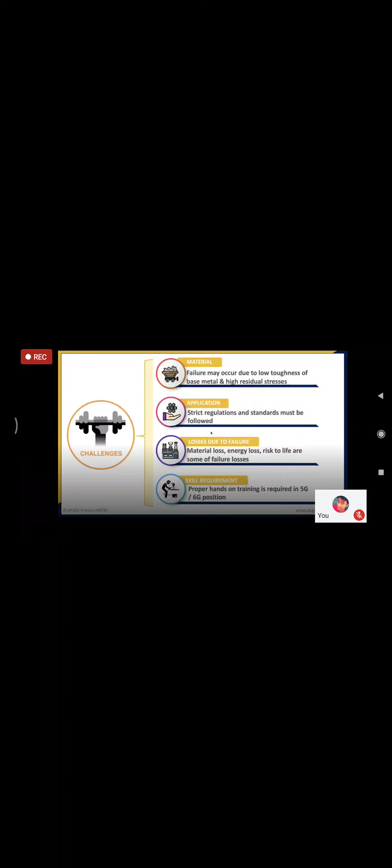Talking about the material, as we move on, new sorts of applications are coming on, and in order to meet those challenging engineering applications and needs, there are new materials which the metallurgists are developing day by day. And in order to fabricate those new age materials, the welding industry has to struggle a lot, because unless we can weld that material, it cannot be used for any engineering purpose.

A good example of that will be our thermal power plants. Very critical application. There is a huge demand of power, which has led to the evolving of new types of material, which have higher creep strength and better life, so that they can carry the fluids, maybe the steam or the gases, at higher temperatures from one place to another inside a thermal power plant.

And that has led to the evolution of very different types of materials with a lot of alloying elements such as chrome and molybdenum. And certainly the materials have been developed, but then to fabricate them, to weld them, is a real challenge, a real nightmare. And a lot of attention has to be paid in order to weld those sort of materials.

Then apart from that, the sort of application I was talking about, there are certain applications which are very strictly governed by regulations and standards, such as the nuclear application. I showed you a nuclear vessel being fabricated and being commissioned. And in order to fabricate that vessel, there's a huge amount of standards one needs to follow, not only national but international standards. Because if those are not met, you cannot commission that unit. So application again throws very grave challenges.

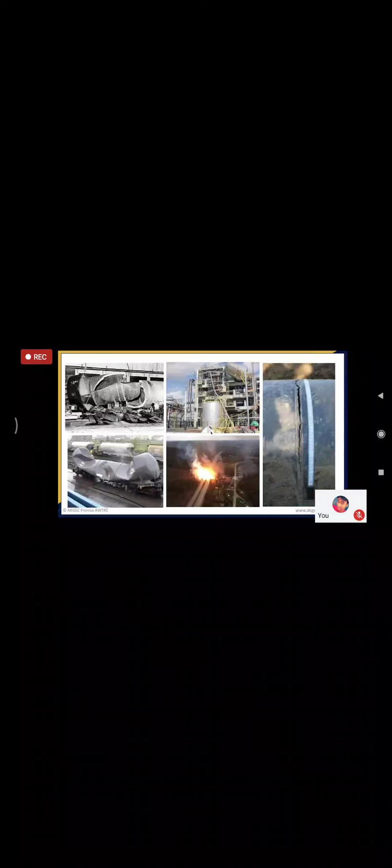Now I'm sure this figure might surprise you, but believe me, I have not put this picture to frighten you, but just to make you aware of what happens if we are not able to follow those guidelines, if we are not able to do the job correctly. This is what can happen. You can see, I don't need to elaborate it. So it can fail, and failing means anything can happen, big accidents, small accidents will happen.

But then yes friends, there is nothing to worry about with this. We have to be cautious enough to do it in the right way. There are processes and procedures available with us to do it correctly, so that we can avoid these failures, and we can do it in the right intended way, so that these vessels and pipelines can serve the purpose which they are intended to serve.

So from here on friends, may I now invite my colleague Mr. Vivek to take on from here, and he will be basically getting into how this is done, how those challenges are faced, how those challenges are met, and he will be able to tell you what are the precautions which we should take in order to avoid those sort of failures. So with this, may I request Vivek to take over. Vivek, please.

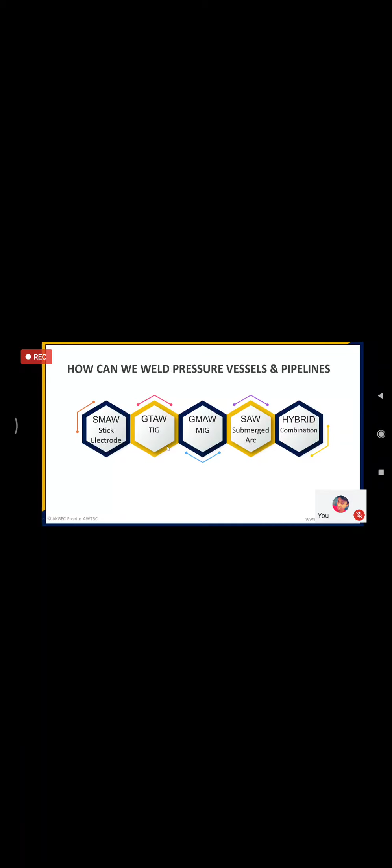So, we commonly know some of the welding processes used for welding in pressure vessels and pipelines. The traditional processes which are majorly used are SMAW, that is shielded metal arc welding, GTAW, gas tungsten arc welding, also known as TIG, then GMAW, that is gas metal arc welding, and SAW, which is submerged arc welding, and we are also using combinations of some hybrid processes. So these are some basic classifications of welding, and the main criteria is how to select welding processes for pressure vessels and pipelines.

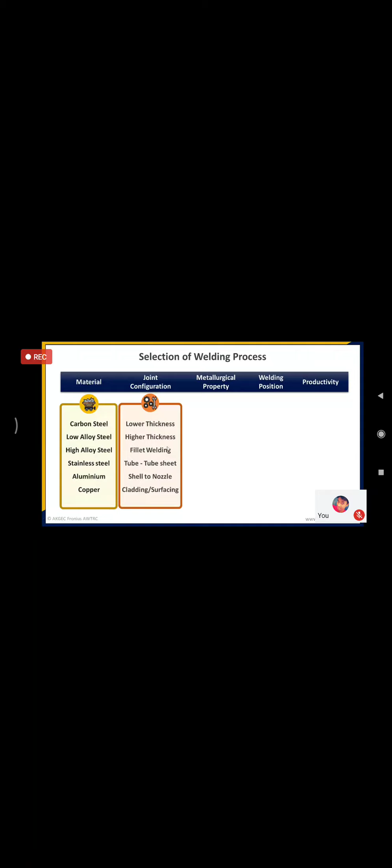Coming to joint configuration, this is also a major challenging part, because in vessels and pipelines we are dealing with very low thickness and higher thickness also. So accordingly, we have to select welding processes so that we can overcome welding defects such as distortion. Talking about some critical welding, in pressure vessels tube to tube sheet welding is very critical, because the tube is about 1 mm to 2 mm thickness, and the tube sheet is around 100 to 150 mm thickness. So it is a challenging task to weld low thickness with high thickness. And after that, shell to nozzle welding and cladding. So accordingly, different welding processes are used for these joint configurations.

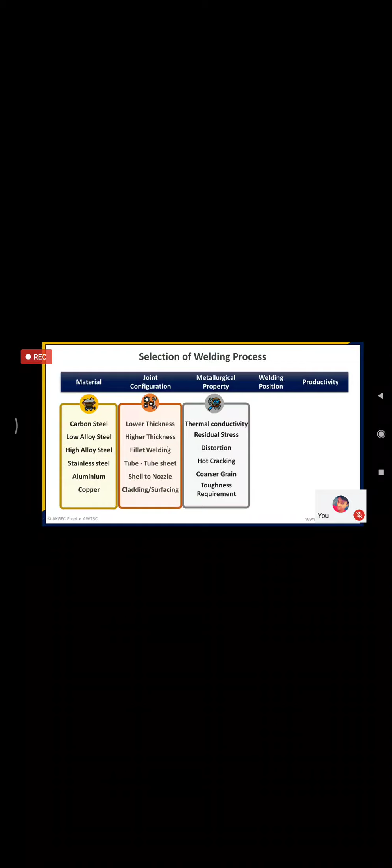Talking about metallurgical considerations in welding, we are talking about thermal conductivity, distortion, hot cracking problems, and toughness requirements as per code and client requirement. So keeping the above in mind, we have to select welding processes.

After that, we are talking about welding positions. Pressure vessels are large, and it is not always possible to weld in flat position. So a number of welding positions come during welding, like horizontal 2G, vertical 3G, overhead 4G, 5G and 6G. So according to positions, we have to select welding processes. And after that, we consider productivity also, because three major passes are considered to weld any vessel and pipelines.

So first one is root pass. So for root pass welding, we have to select some manual process or automatic process. And after that, fill up and capping passes and final run. So to complete all these passes, we have to select single welding processes or multiple welding processes depending upon thickness and requirement of welding.

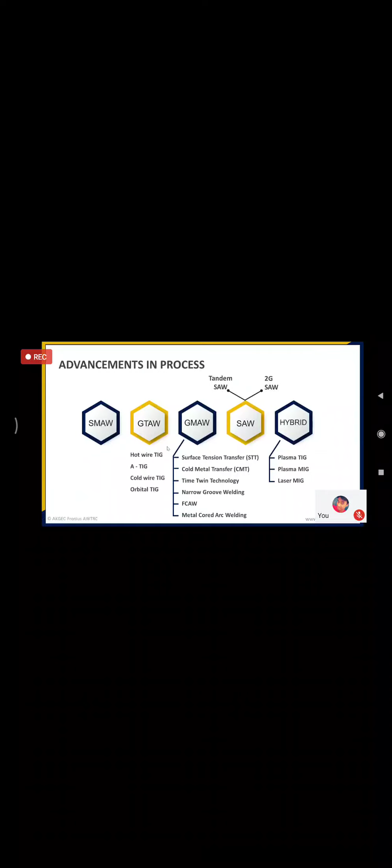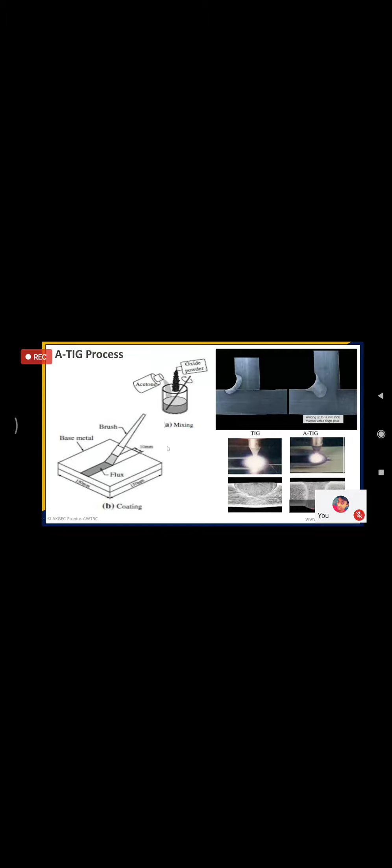Here in figure we are seeing that complete root penetration is coming with activated TIG, but with TIG welding there is lack of fusion. So by using activated TIG process, one can weld up to 12 mm thickness in stainless steel in single pass weld. So this is a very great achievement of TIG processes, and this can be used in varieties of materials like stainless steel, carbon steel, and alloy steel.

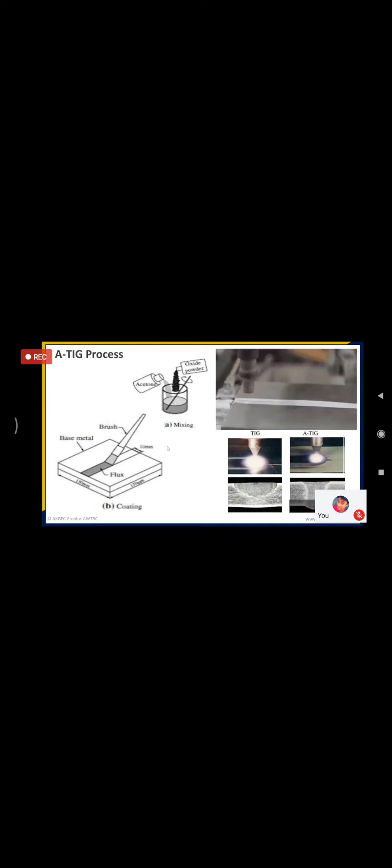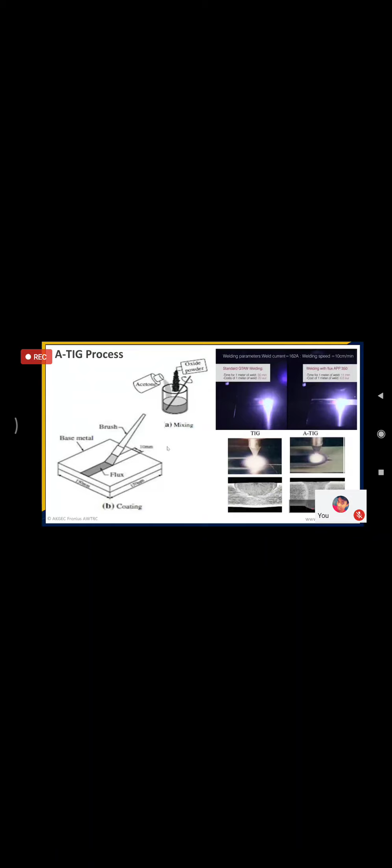Some of the advantages are that we do not need to prepare any groove for this, so it can be welded on square butt joint without any preparation, and also overall reduced distortion than multi-pass GTAW welded joint by using this activated TIG. So here we have to only make a thin coating of activated flux material over the workpiece before welding.

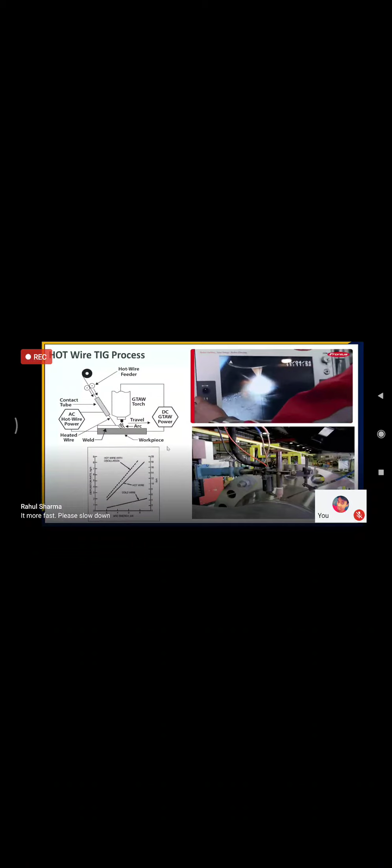So going to next welding processes, this is hot wire TIG process. So hot wire TIG process is a further development of GTAW process. So here in figure, we are seeing that an additional filler wire is provided, which is resistance heated and added to the weld puddle behind the tungsten. So it can be mechanized and automated for welding and cladding application.

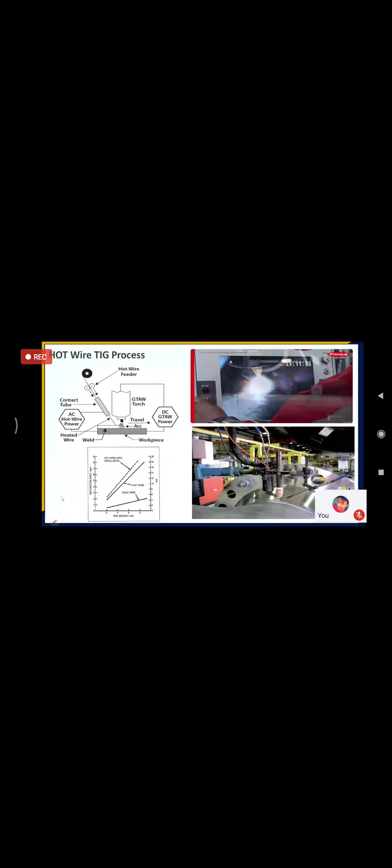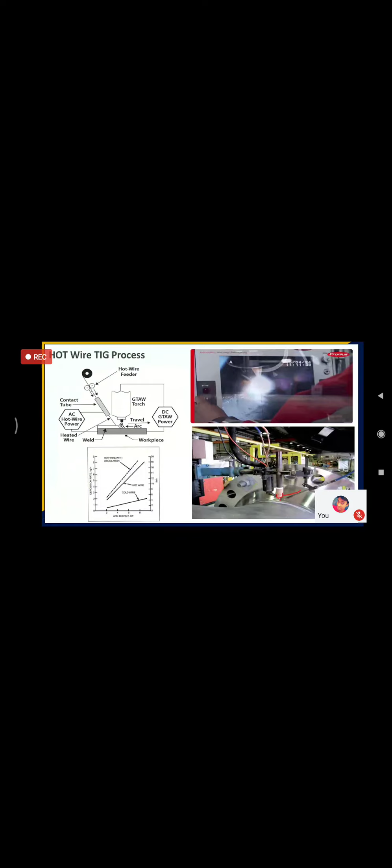So in figure we are seeing that wire is coming from wire spool, and GTAW torch is used for making arcs. So it completes the welding by using mechanization, and this process has higher deposition rate. When we are comparing simple cold wire TIG and hot wire TIG, here we are seeing that hot wire TIG is associated with higher deposition rate.

So this is generally used for welding of stainless steel grades, duplex steel, high nickel alloy steels. Well, this process is not suited for out of position welding, so it is generally welded in 1G position.

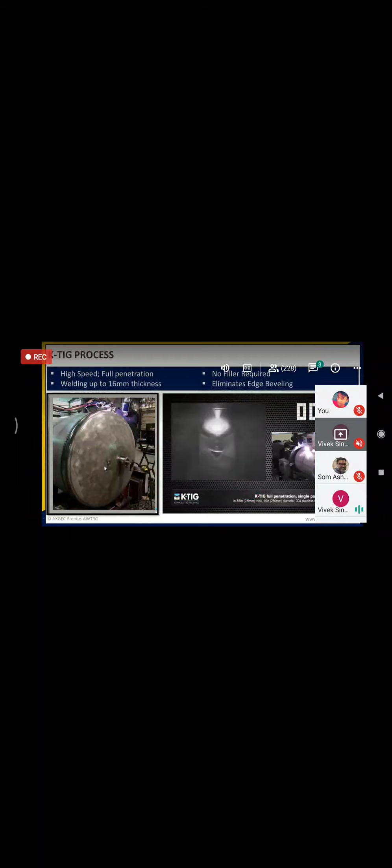After that, coming to next welding processes, this is keyhole TIG. So keyhole TIG provides us single pass keyhole welding in a material. So by using this K-TIG process, one can weld up to 16 mm thickness at higher welding speed. So we can attain higher welding speed up to 1000 mm per minute. And also here we are seeing that this process does not require any butt joint preparation. So it can weld in square butt preparation and also reduce overall welding cost.

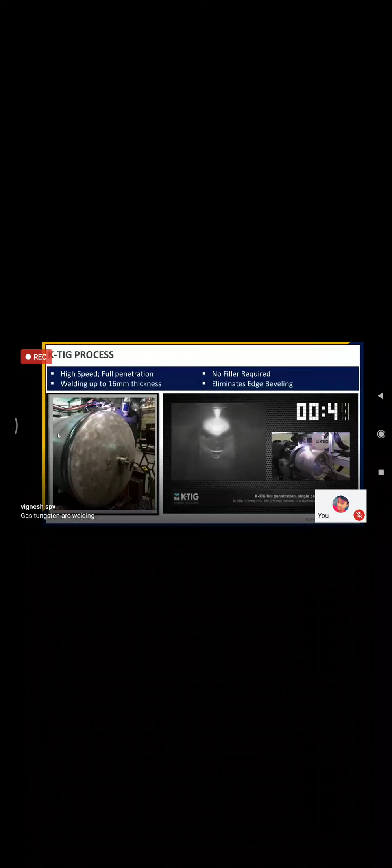So by using K-TIG, we can weld longitudinal seams and circumferential joints over stainless steel vessels, duplex stainless steel, titanium steels, etc.

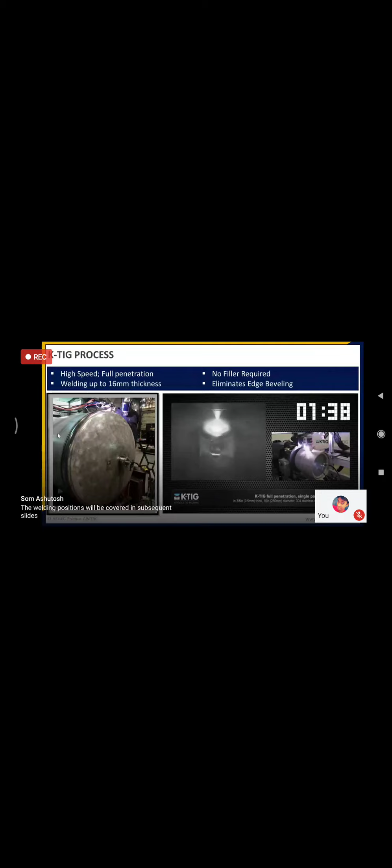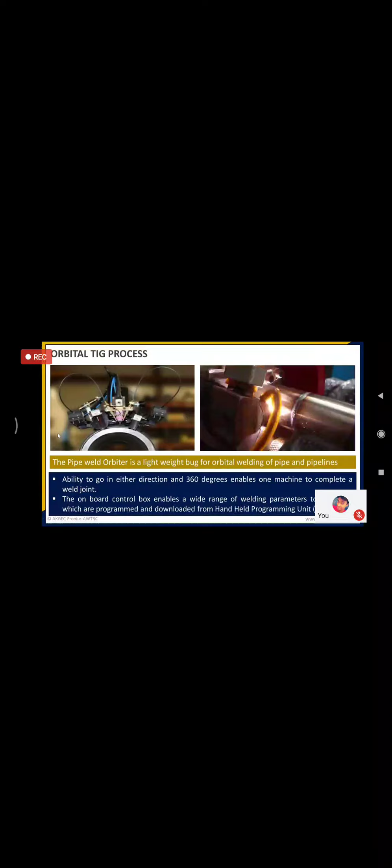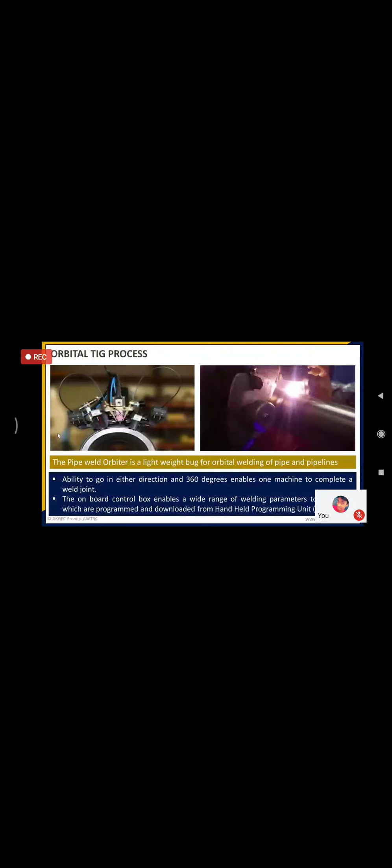After that, moving to next, we are seeing orbital TIG process. So this orbital TIG process is majorly used on pipe to pipe welding and tube to tube sheet welding in pressure vessel. So here we are seeing the welding where the arc is rotated mechanically through 360 degrees around the static workpiece. So the workpiece is stationary and the arc is rotating around 360 degrees with the help of welding heads.

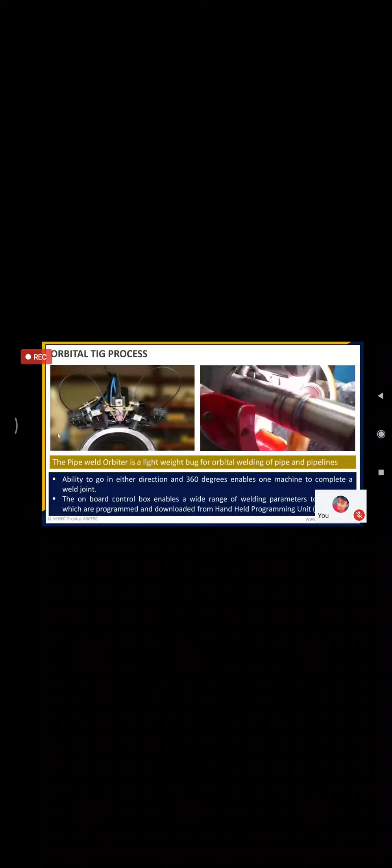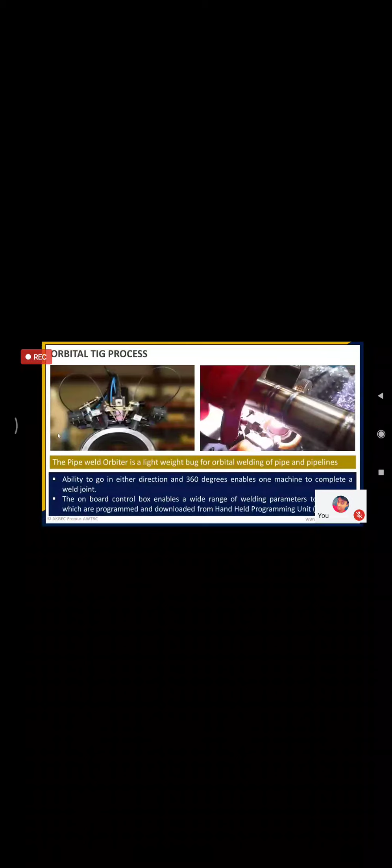So here welding around the pipe resolves the skill associated with it, as highly skilled welders are needed in the manual TIG welding process. So by using orbital TIG, we can easily weld at higher speed. So here uniform welding around the pipe can weld up to 162 mm dia and thickness of 3.5 mm. Large dia can also be welded by accommodating an open style welding head.

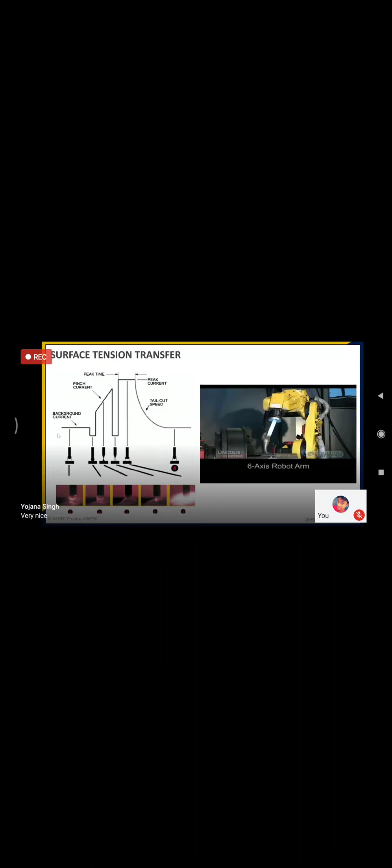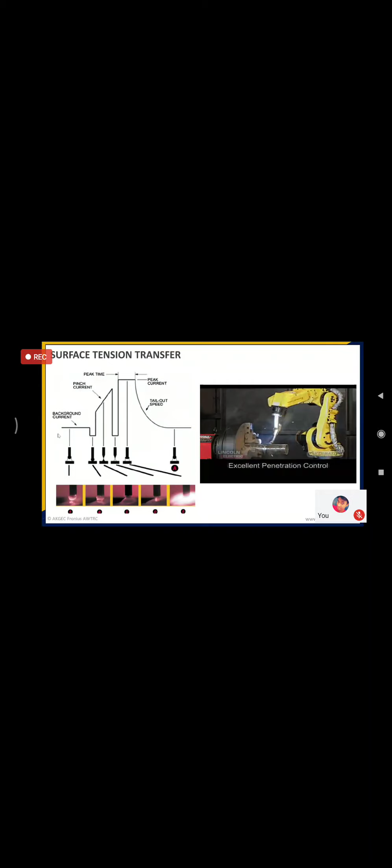After that, coming to the variants of GMAW. So first one is STT, surface tension transfer. In surface tension transfer, this welding process is used to weld the root run in pipe welding. Generally, root run welding takes a lot of time because the welder needs skill to fill the root run. So by using surface tension transfer, one can increase the productivity 4 times faster than the GTAW process with low heat input and no lack of fusion.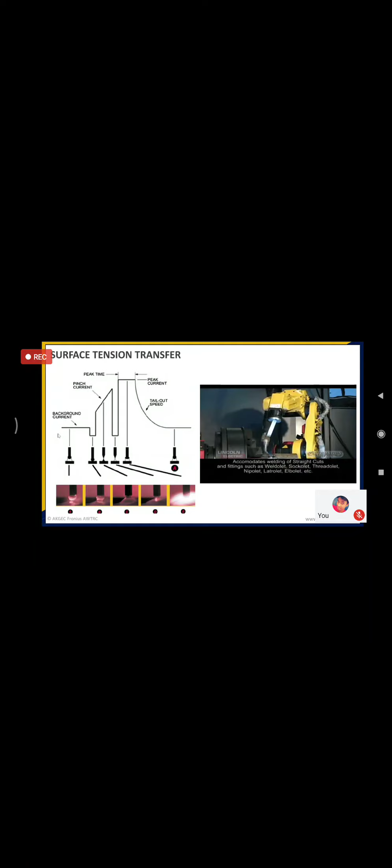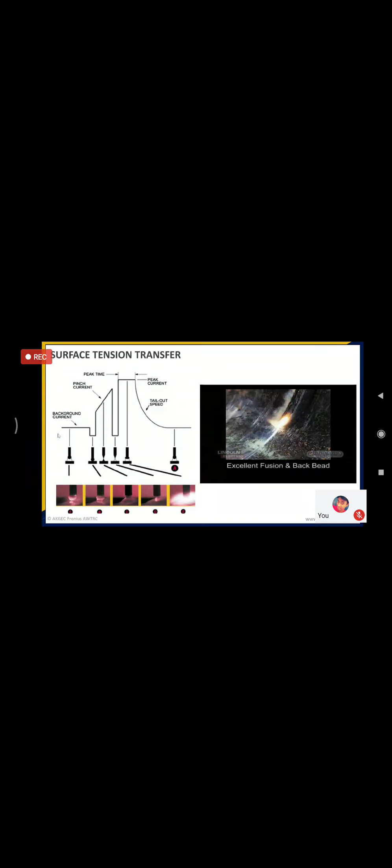So in surface tension transfer, it uses short circuit transfer. The wire is fed to the puddle. In this figure, we are seeing that the wire touches the puddle, causing the short circuit and voltage drop to zero. This technology monitors and controls the surface tension of the weld droplet as it adheres to the weld puddle. So this welding is very commonly used in pipelines for root run welding.

After that, talking about cold metal transfer, this is very commonly used for many industrial applications for low thickness. By using cold metal transfer, we can weld up to 3 mm thickness without distortion and at very low heat input. Here we are seeing that the welding power source is connected to a robotic system. So what makes it different from the conventional GMAW process? We can see it by this figure.

In conventional MIG there is only one direction, the forward feeding direction of the wire. But in CMT, in the left figure, we are seeing that the wire is moving both in forward and reverse direction. This makes it different from conventional MIG welding. So CMT provides a controlled method of material deposition at low heat input by incorporating an innovative wire feed system with high speed control. It can be used for automotive applications, aircraft applications, thin sheet welding, and dissimilar joints of aluminum and steels, etc.

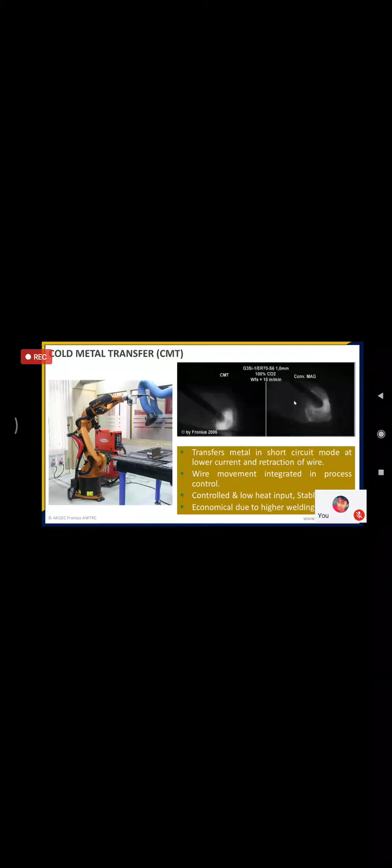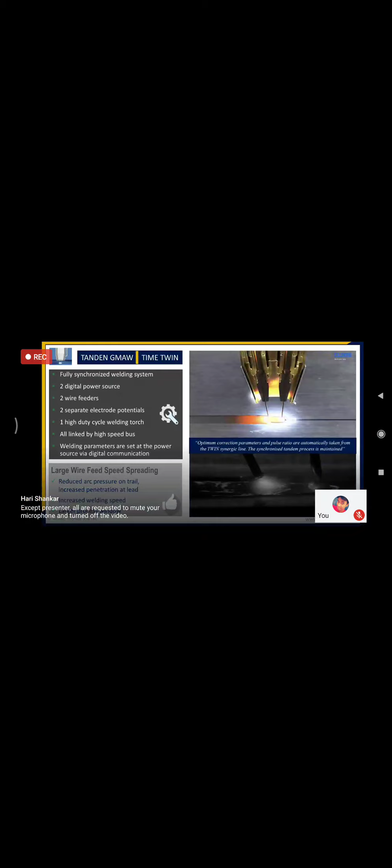After that, moving to next process. So here we have tandem GMAW. Basically, this is a Fronius based technology and uses twin wire. By using this, we can get at least twice as fast compared to the standard GMAW process. This process incorporates a microprocessor controlled TPS power source through which we can improve the productivity. Here two separate wire electrodes are used for higher deposition with different power sources, and this also reduces the overall arc pressure and increases the penetration in the base metal.

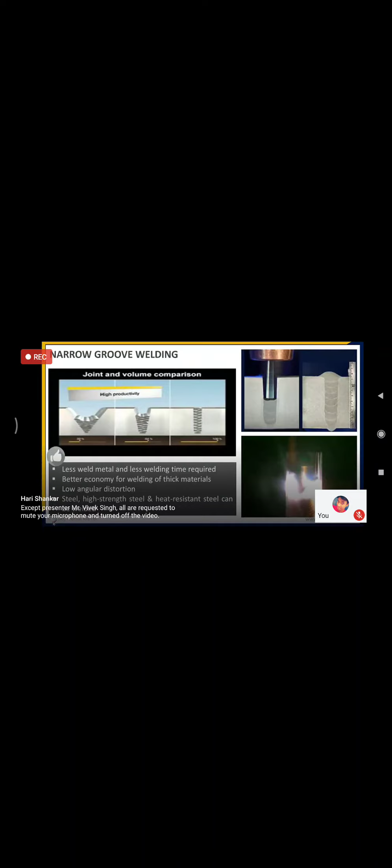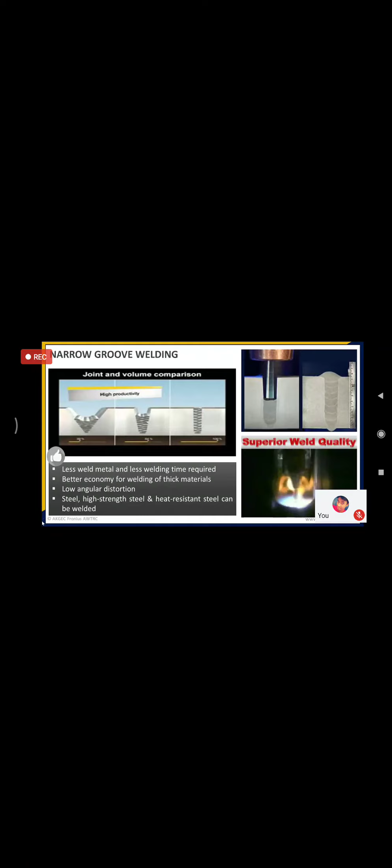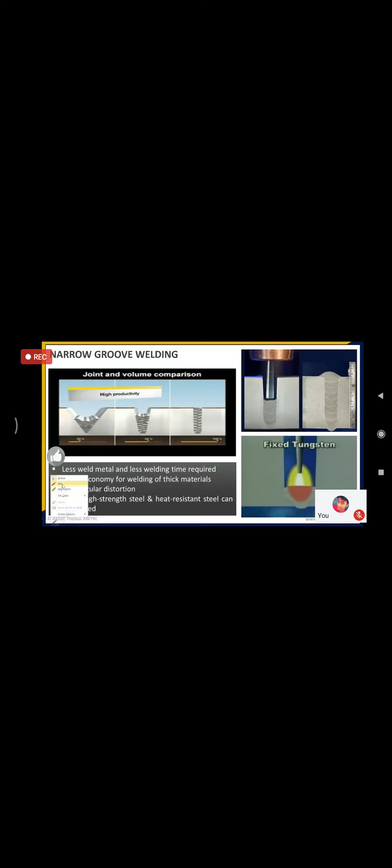So here we are talking about narrow groove welding. Narrow groove welding is also a variant of GMAW, which is used for low metal deposition requirement and a small included angle, between 2 to 20 degrees. Here we are comparing with a single V groove, where we see that a very large amount of weld metal is required. But with narrow groove welding, very low weld metal is required to complete the weld.

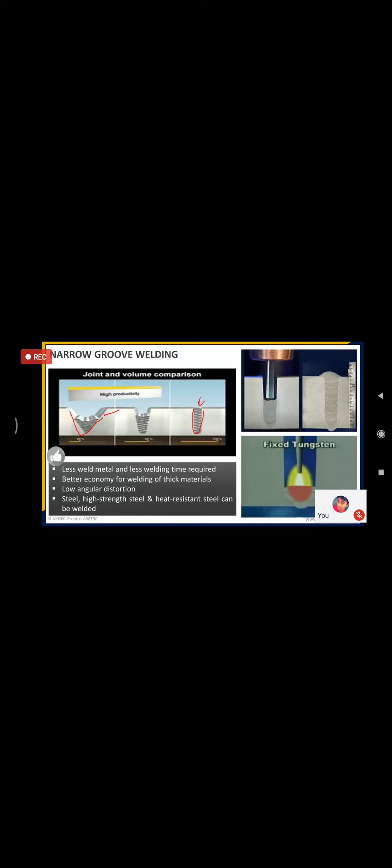So the major advantage is that overall we get a more economic weld, and it offers better economy for welding of thick materials, above 50 mm thickness. It leads to low distortion and fast welding also. But sometimes one major problem is there: we can get side wall lack of fusion. So this is a critical issue, but overall this process is very good for higher productivity and increases the economy of any welding system.

And after that, here we will talk about tandem SAW. In tandem SAW, we are using two wires, as we have seen in GMAW technology. So a two wire system is used. By using this, we can achieve a higher deposition rate of up to around 40 kg per hour.

So this process is majorly used for longitudinal seams and circumferential seams of vessels. Here we are seeing that we are using two power sources, one DC and another AC power source. These are combined to overcome the problem of arc blow, which is generally associated with DC welding. The major advantage of this process is a higher deposition rate and economy when we are talking about production of vessels in large numbers.

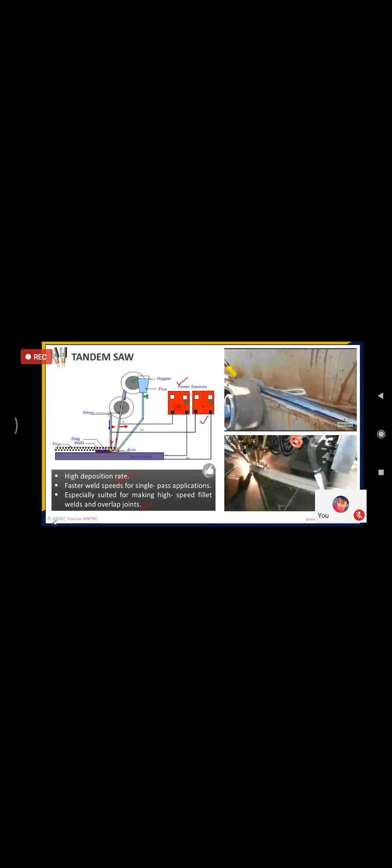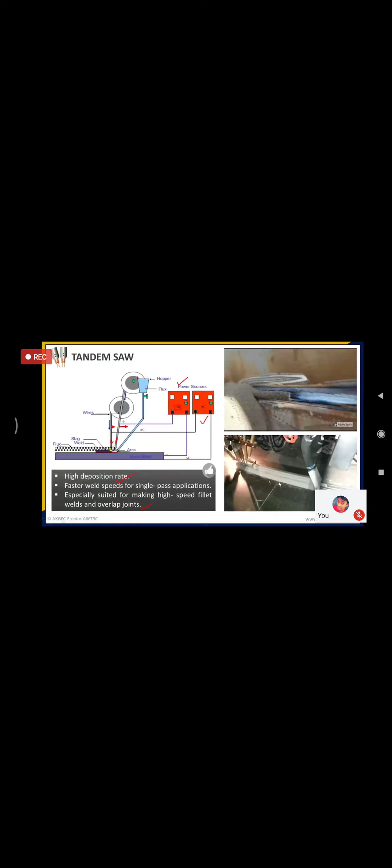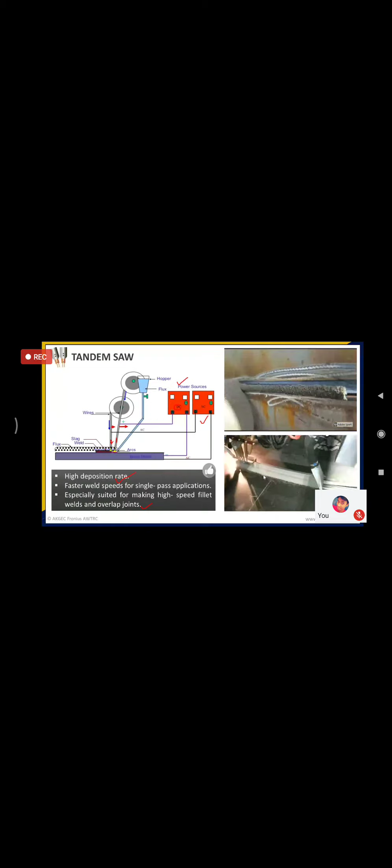And here we will see some example pictures of this tandem SAW. Here we are seeing the flux hopper system for providing flux, and the twin wire system of SAW is going on. Similarly, talking about tandem SAW, we also talk about 2G SAW. Generally, SAW is welded in flat position, but it can be welded in 2G position by using some additional arrangements for providing flux. So circumferential welds and longitudinal welds can be welded using these processes.

After that, we will talk about laser MIG welding, a hybrid welding process. Laser MIG welding is very popular in welding of various non-ferrous materials. The laser beam hits the surface of the base metal to form a keyhole. There we get a combination of high welding speed and the concentrated energy of the laser combined with MIG arc welding. So overall productivity and higher welding speed are the main achievements of hybrid processes.

Similarly, we can also weld with hybrid processes like plasma TIG and plasma MIG, which do not need any groove preparation up to 12 thickness, so we can easily weld without making a groove. But the main challenge with these processes is that they need a very good setup before welding. If the setup is not proper, there will be chances of burn through. So these are some important considerations which should be kept in mind before welding.

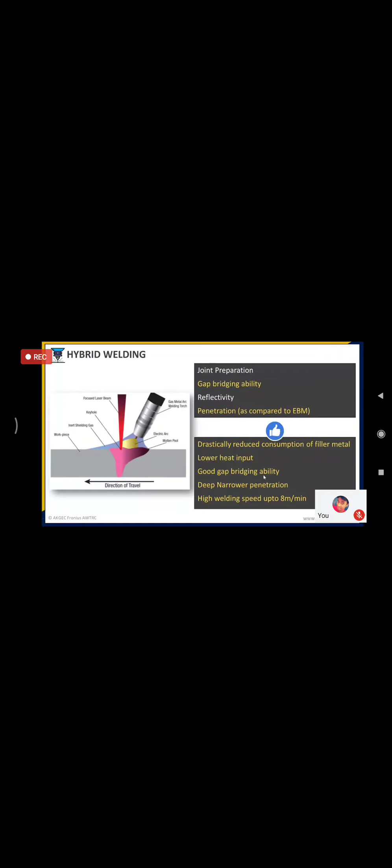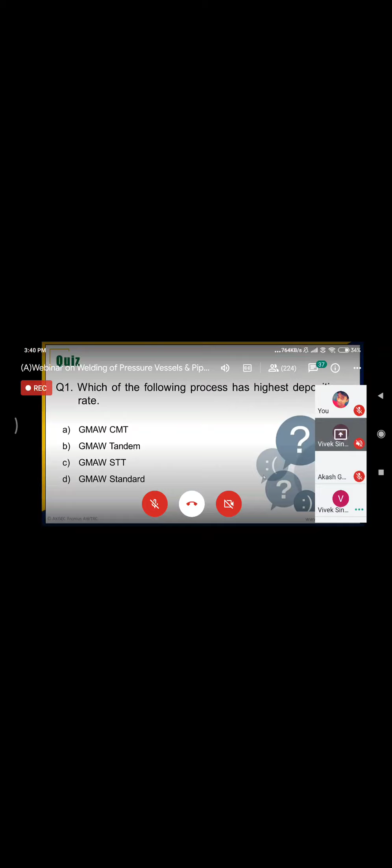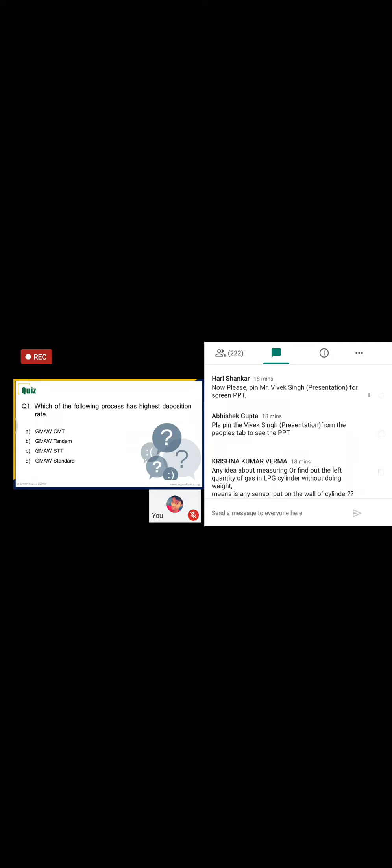So now it's time for a quiz. Here we have some questions for you. The first one is, which of the following processes has the highest deposition rate? A. GMAW CMT, B. GMAW tandem, C. GMAW STT, and D. GMAW standard. The answer is B, GMAW tandem, because with twin wire we can get a higher deposition rate from this welding.

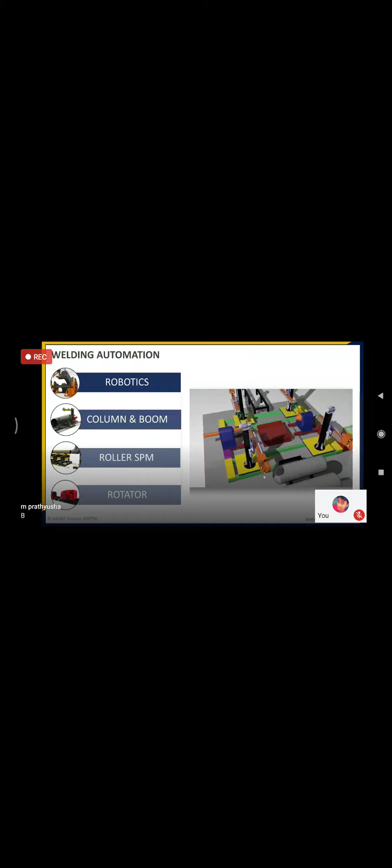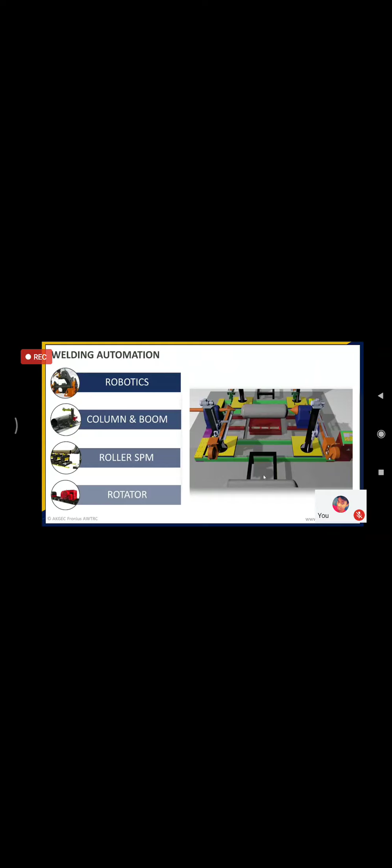Okay, after welding processes, we will now come to welding automation. Automation is widely used in the pressure vessel and piping industries to increase overall productivity. For welding automation, we use robots, column and boom systems, roller SPMs, and rotators. Here we are seeing some automation systems used for welding pressure vessels. There is a narrow gap SAW used in a column and boom system, which can do circ seam welding and long seam welding.

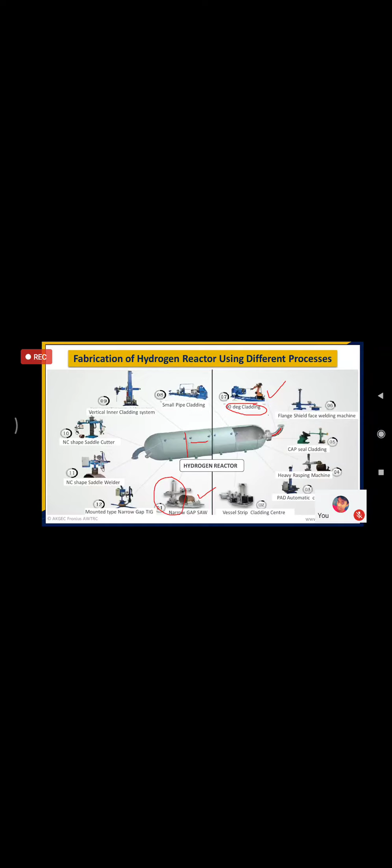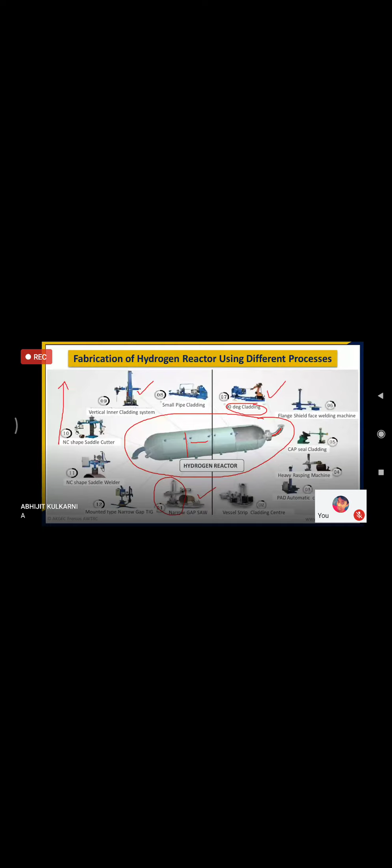Similarly, for pipe welding we have another automation system, a cladding system, which can be welded by robotic technology. The cladding system is also a mechanization and automation system. Similarly, for welding a complete vessel, today there are many automation systems available to weld these joints. By using these automation systems, we can increase productivity and overall welding quality.

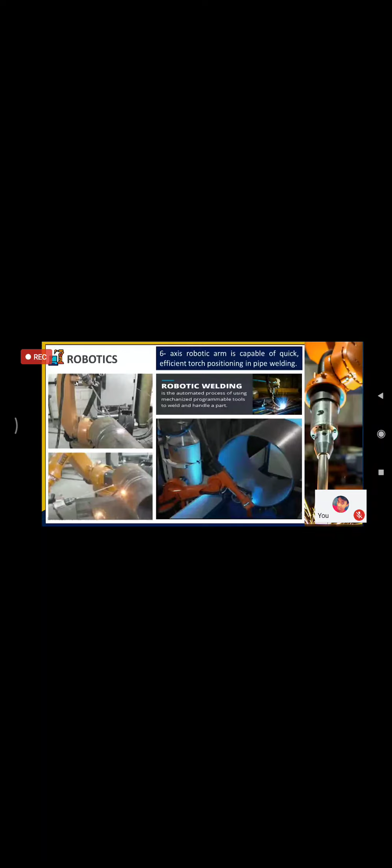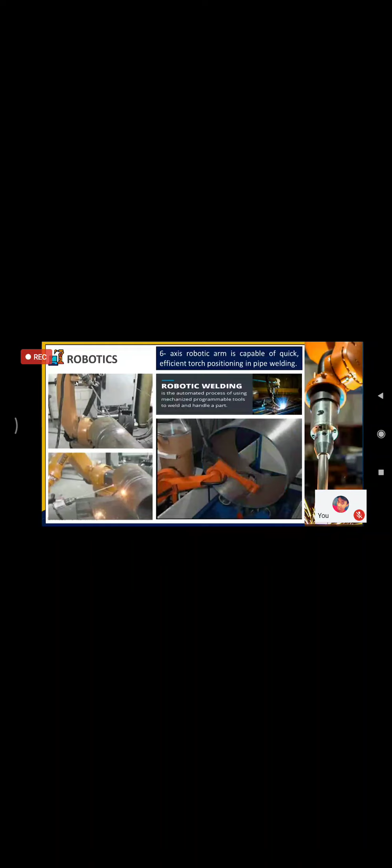Talking about robotics, here we can see a robot used in welding long seams and pipes. Long seam welding is going on in this figure with the help of robotic welding. Robotic welding is very precise, moving smoothly at considerable speed through a programmable path. It can also weld some critical applications like pipe to weldolet joints and nozzle cutout welding. By using a programmable path, we can easily weld with robotic welding, and we can mechanize GMAW and GTAW processes using robotic welding.

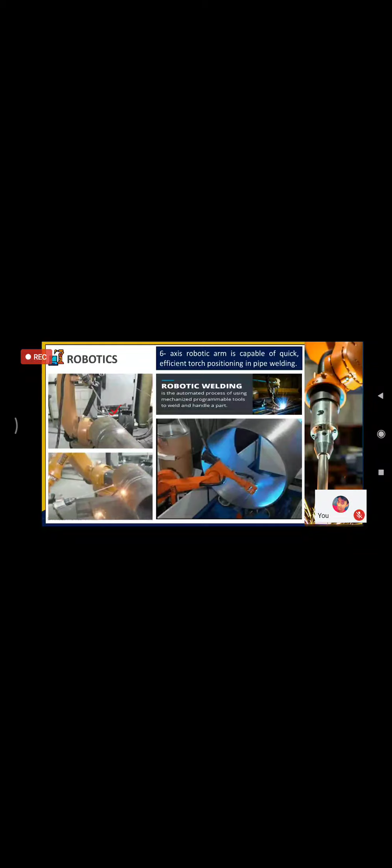And also here, one good trick: you can see that the SMAW process is also welding with a robotic system, but it is not feasible for actual production due to the continuous changing of electrode after every pass. But it is most widely used with GMAW technology and GTAW technology.

So it can weld from small pipelines to large vessels. So the major advantage is that the overall productivity is increased by using a column and boom system, and after that flexibility is there, that is, from smaller to larger dia we can cover with a column and boom system.

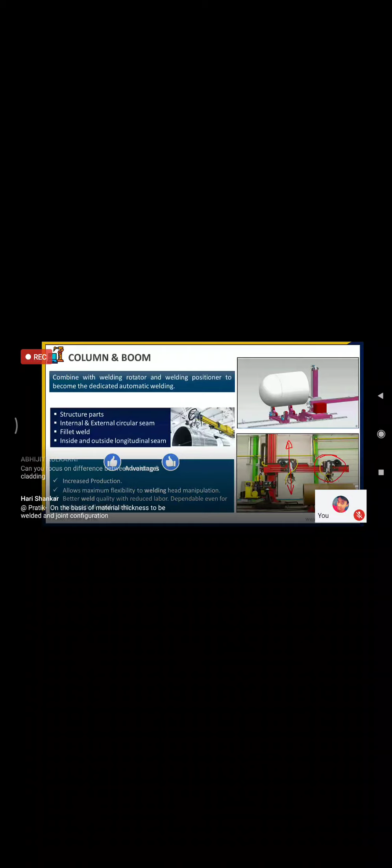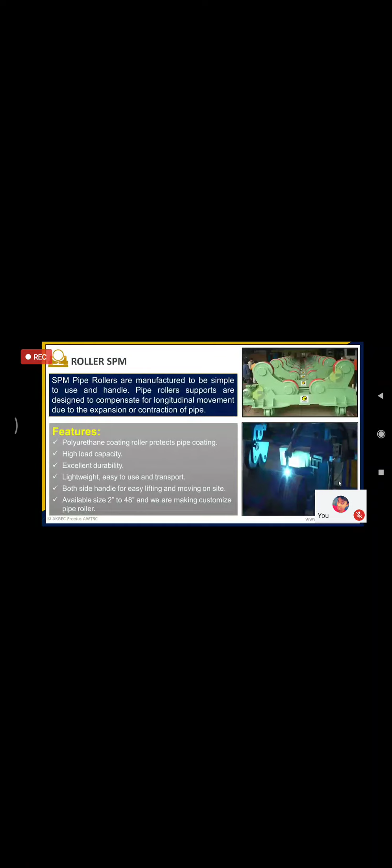After that, talking about roller SPM, here we are seeing that a pipe is mounted over the roller and the roller is moving, and we are seeing that the welding torch is mounted in only 1G position and the complete welding is going on. Similarly, this can be used for pressure vessels also. So some features of these rollers are high load capacity, excellent durability, and it can weld 2 inch to 48-inch pipe over this roller SPM.

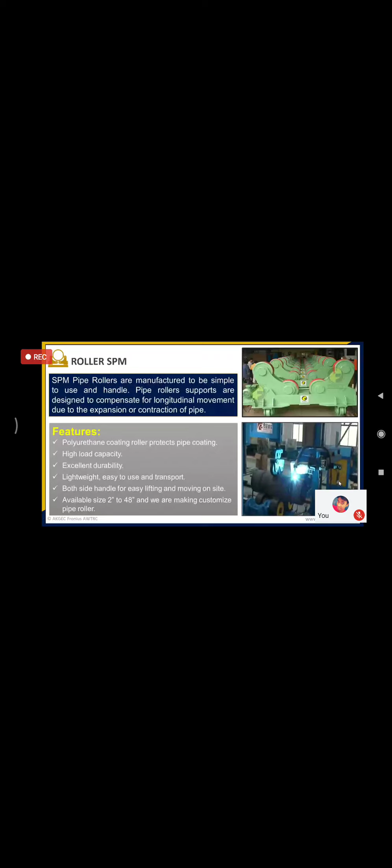Talking about rotators, here in the rotator we can see that various dia of pipes can be welded in 1G position. As here we can see, we can also use it manually. So all these rotators facilitate the overall productivity of welding. So it can be used for various pipelines, nozzle cutouts, welding.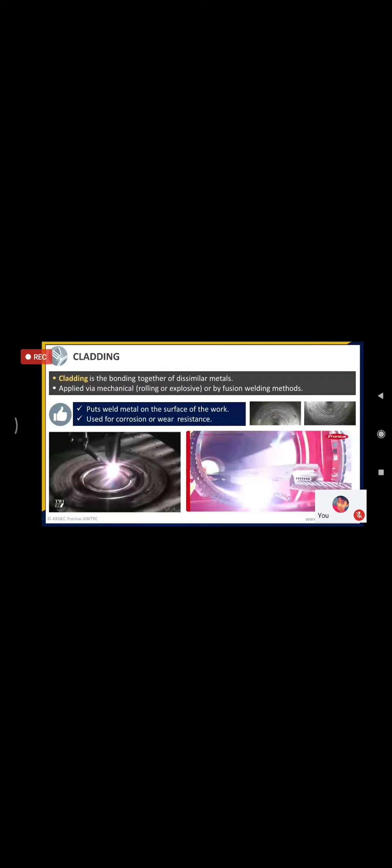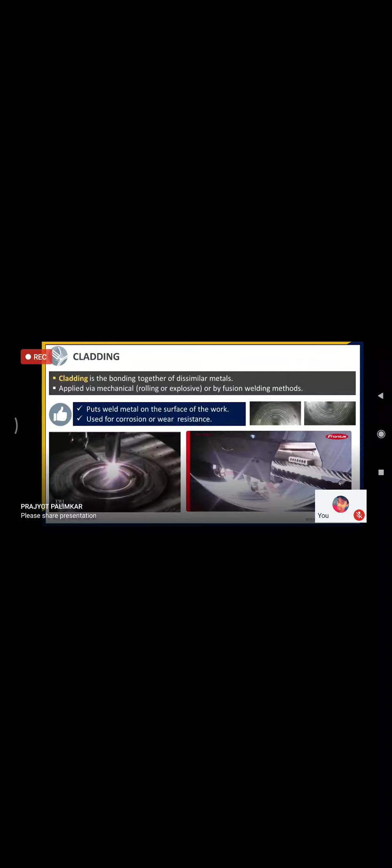After that, we will talk some about cladding. So here cladding is a technique to weld dissimilar metal, that is, over carbon steel we have to lay stainless steel or nickel-based alloy, so we can use it for corrosion resistance. So here in the figure we are seeing that hot wire TIG is used for cladding applications. Similarly, we can use GTAW technology, and after that electro slag strip cladding, that is used in high dia pressure vessels for cladding the vessel.

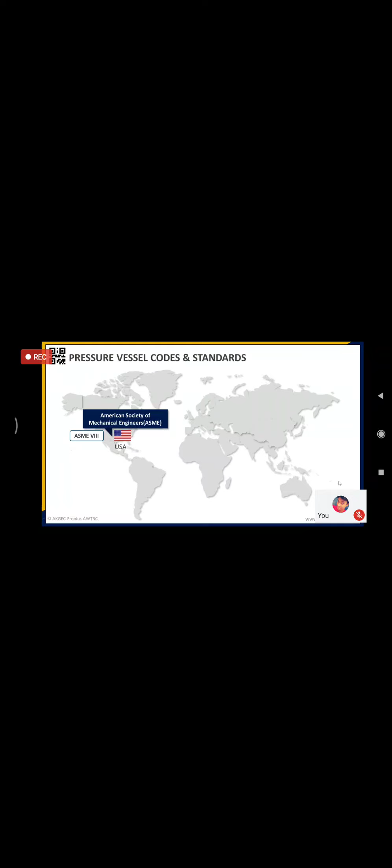And now we will look over the codes and standards used for pressure vessels and pipelines. So here we are talking about pressure vessel codes and standards. So mostly in industry, American Society of Mechanical Engineers, ASME codes are very popular for pressure vessels. So for pressure vessels, ASME Section 8, Division 1, 2, 3 are used to weld pressure vessels.

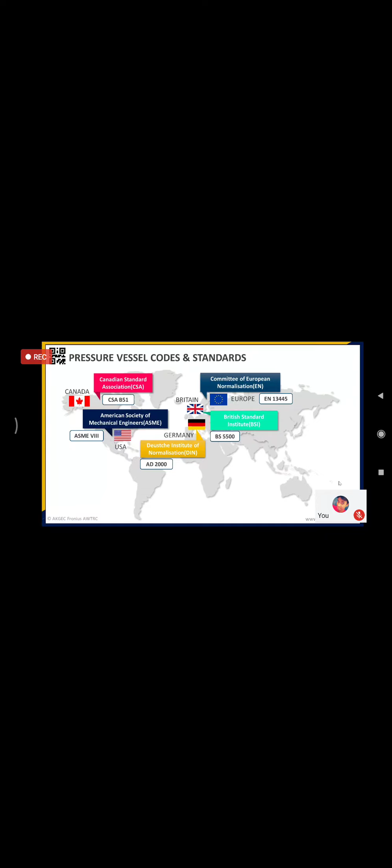And after that, similarly for different countries: for Canada there is a different standard, CSA B51, and talking about Germany, there is the AD standard, and after that for British standard there is BS 5500. After that there is the EN standard for pressure vessels, the Japanese standard, and definitely for Indian standard also there is IS 2825 for pressure vessels.

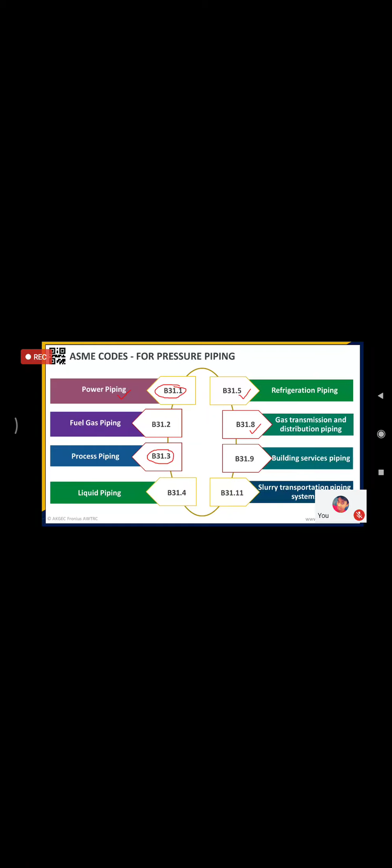So after that we are talking about some codes for pipelines. So generally for power piping, B31.1 is very common. This is an ASME standard. And talking about process piping, this uses B31.3. And after that, similarly, we have refrigeration piping that uses B31.5, and gas transmission and distribution piping includes B31.8. So these are the different ASME codes for pressure piping. Similarly, we can weld by different codes and standards for pressure vessels and piping.

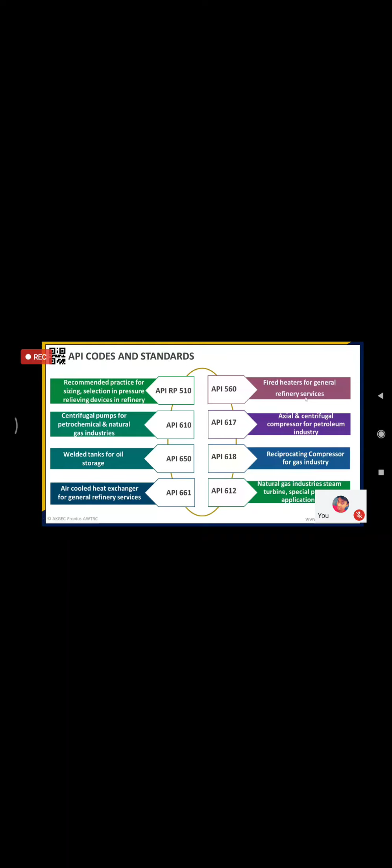Talking about some API codes, here we are seeing that API 510 is used as recommended practice for sizing and selection of pressure relieving devices in refineries. Similarly, API 650 is used for welded tanks for oil storage. And similarly, API 560 is used for fired heaters for general refinery services. So basically, these codes are generally used during maintenance of pressure vessels, overhauling of pressure vessels, and looking at the safety requirements. All these codes are used for different applications.

Okay, now we will talk about WPS, PQR and WPQ qualification. This term is very well known to the welding industry. Every welding engineer has to make WPS, PQR and WPQ. This is a very vast field, but I will just cover the introductory level so that you might understand the significance of these terms.

So here we are first talking about WPS. WPS is welding procedure specification. The WPS is a written document that provides directions for a person applying the joining processes. That means by using WPS, a person comes to know what type of joint he has to weld, what type of base metal he has to weld, filler metal requirements, welding positions, preheat, PWHT, shielding gases, welding parameters, and welding techniques. All these things are given in WPS. So by using it, one can know how we have to proceed with a joint.

And talking about PQR, PQR is procedure qualification record. It is used to demonstrate that the joining process proposed for construction is capable of producing a joint having the required mechanical properties for the intended application. That means here we are testing the base metal for its applicability for intended applications. So by using PQR, one can document the testing results of actual values, essential variables, and other requirements.

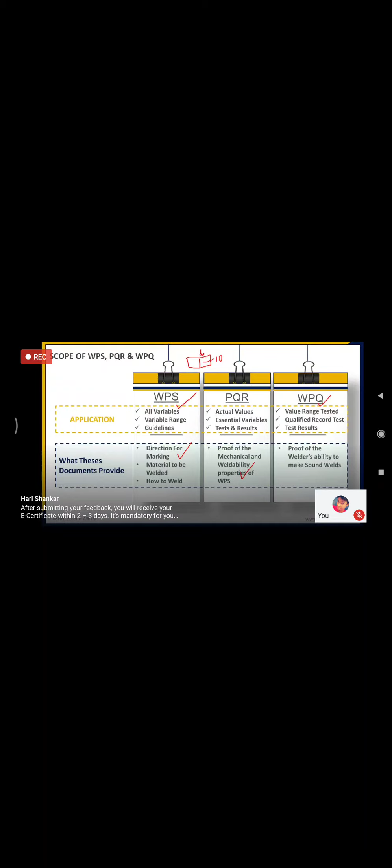Talking about WPQ, this WPQ is known as welder performance qualification. It is used to demonstrate the ability of a welder to produce a sound joint by using WPS. So WPQ is for the welder, and WPS is for the welder to make a joint so that he can follow the instructions to weld a particular joint. Suppose in a vessel there is a suction joint of 10 thickness. Then a welder comes to know what welding current he has to use, in which position he can weld the vessel, and what type of filler he can use. All these details are given in WPS.

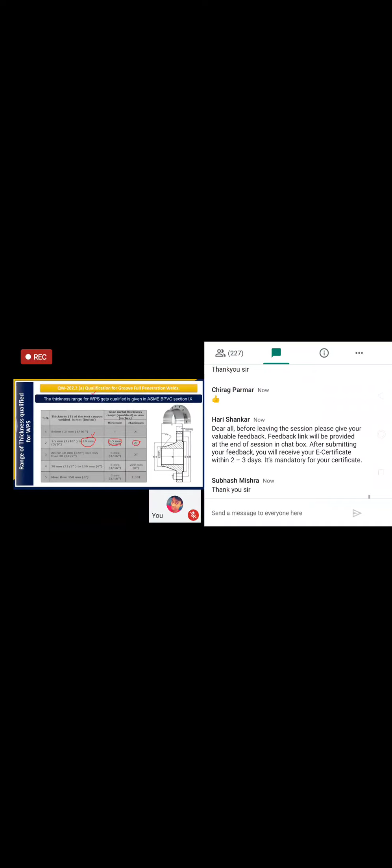And talking about ASME Section 9, in ASME Section 9 there is a range of qualification of thickness. Somebody may have the question: for every thickness, do we need the same WPS or a different WPS? The answer is that if, suppose, we have qualified a 10 thickness WPS, then with that WPS we can weld from 1.5 to 2T, that is 20 thickness. So for every material we need not qualify a new PQR and WPS. There is a range of the WPS that we can use for welding vessels, and we can easily use it within the selected range.

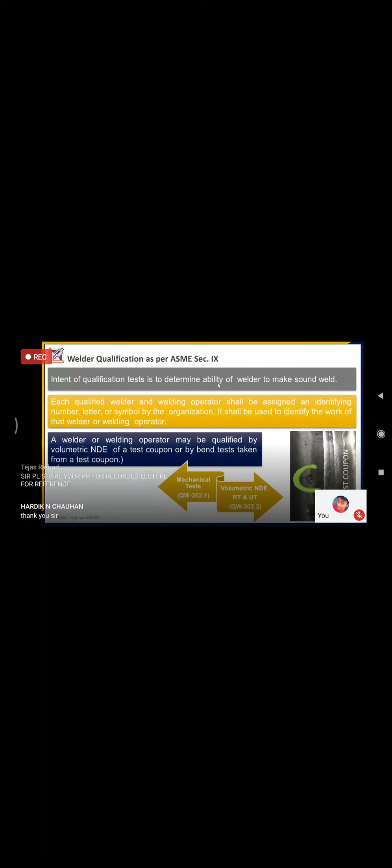Talking about welder qualification, welder qualification is used to test the ability of a welder to make a sound weld. After any weld, here in the figure we see that a welder stamp is there. The welder marks their stamp beside the weld. That marking is used to identify which joint is made by which welder, and in future if there is any problem in welding, it can be traced which welder did the welding, and similarly we can trace the radiography film and so on.

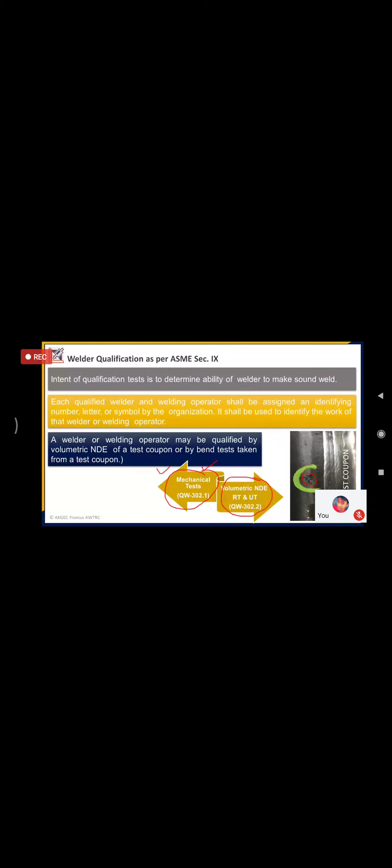For welder qualification, we can qualify by two means. The first one is mechanical testing, so by using a bend test we can qualify welders as per ASME Section 9, and there is also volumetric NDT, that is radiography and ultrasonic testing. Similarly, talking about welders, we will go through some welding positions. There are different positions for pipe and plate. For plate groove welding there are 1G, 2G, 3G, and 4G positions.

In welder qualification, when a welder is qualified in 1G, that means he has welded in 1G position, then he can weld in 1G only. Suppose in a pressure vessel or pipeline he has to weld in 3G position, then he cannot, because the range of qualification of 1G is only flat. If the welder is qualified in 3G position, then he can weld both 1G and 3G positions. So similarly, all positions need different qualification for the welder.

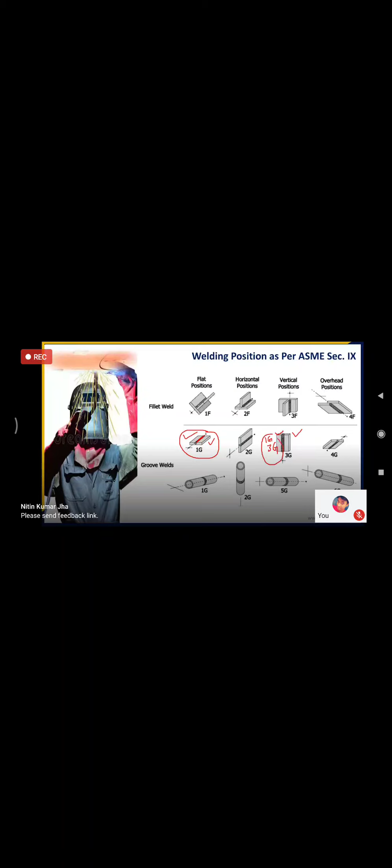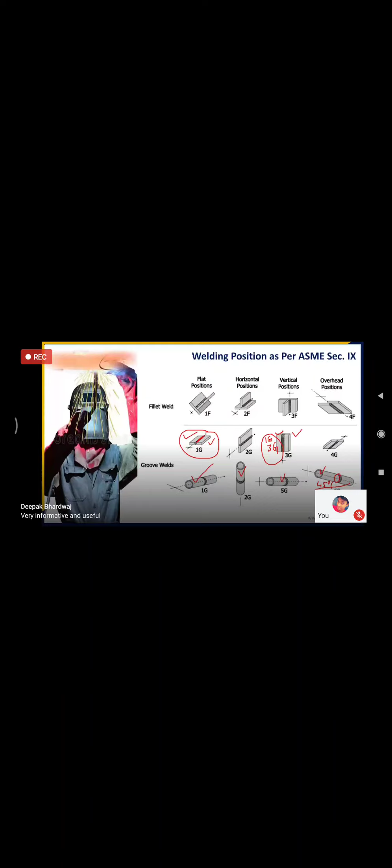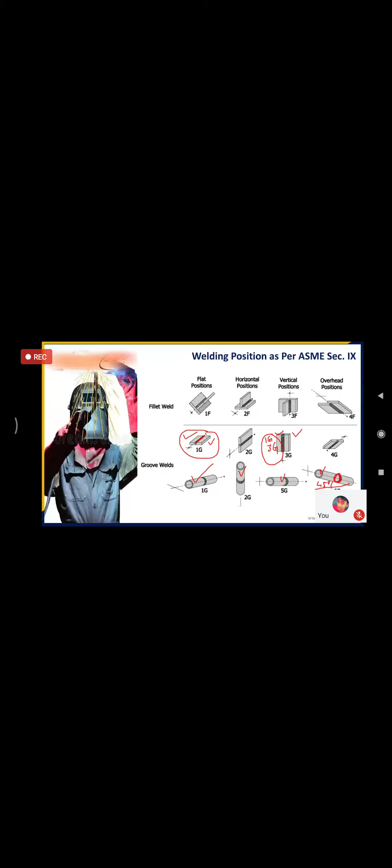But for pipe welding we have 1G, 2G, 5G, and 6G positions. The 6G position is the most critical welding position used by welders. In 6G position, the pipe is inclined at 45 degrees, and the welder welds throughout the circumference. If a welder is qualified in 6G position, he can weld all positions. So mostly pipeline and pressure vessel welders need 6G qualification, so that there will be